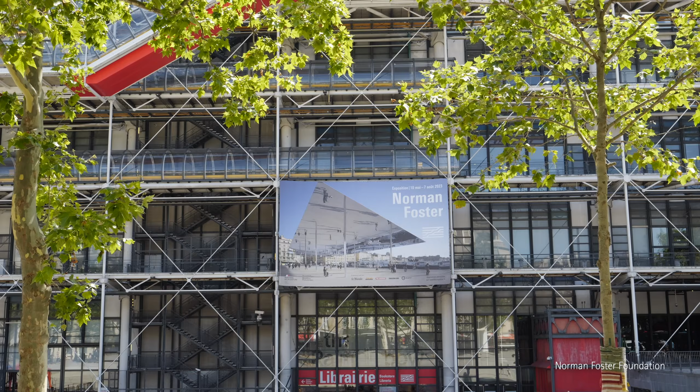The Centre Pompidou is really a pluridisciplinaire institution. It means that in this house we can enjoy all the different aspects of the creative process. There's only one Centre Pompidou, and it is really a cultural mixing pot. It's an iconic structure that comes out of very close colleagues, so it has a certain association with my generation. I was there at the inauguration of the building with the architects. So in that sense, it's very special.

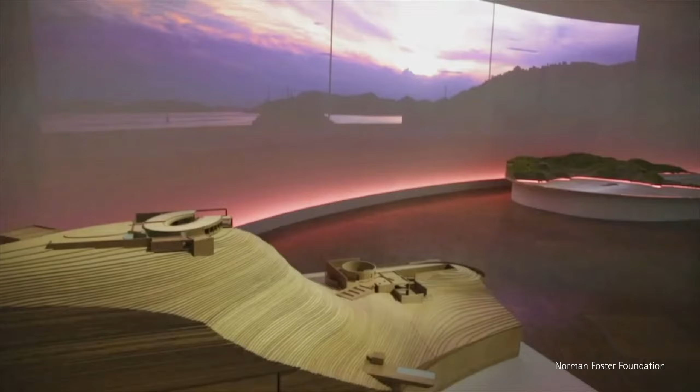First, I met Norman through books, through his presence in the history of architecture. And I met Norman in person lately, because I received a phone call from him directly, and I was very surprised. He said, 'Hello, I am Norman Foster, and I would like to know if it's possible to visit the Tadao Ando exhibition.' I said I would be very pleased to introduce him to it. He came with Elena Foster, and I made a full visit of the exhibition. At the end, I understood the desire to do something like this was present. Three months after, I asked for a personal meeting with Norman in London, and we began to speak about the opportunity to do something together.

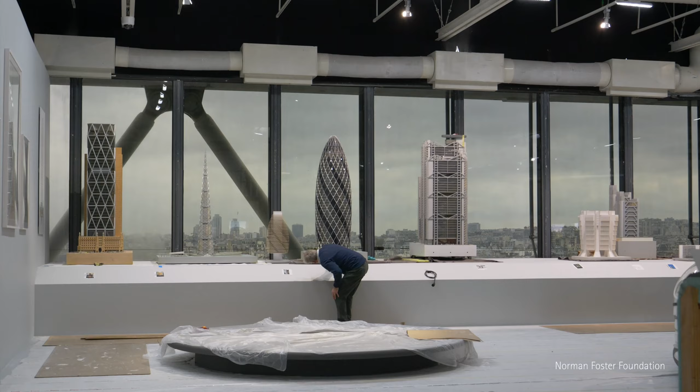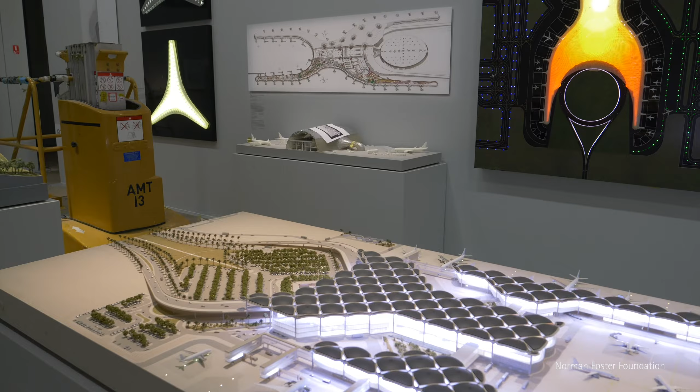Pompidou is about breaking down the barriers between the different disciplines: visual arts, film, photography, painting, sculpture, architecture, design. The exhibition we created for that venue is similarly about design in a broader sense. It's about issues of the city, master planning. It's about artifacts, vehicles, flying machines. It's about beauty, it's about function, it's about the common denominators that bring these different aspects of design together. So there is a synergy between the mission of Centre Pompidou and the exhibition we created for that venue.

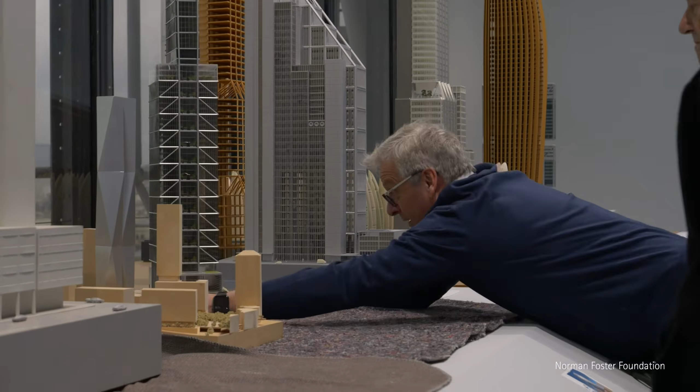To host the Norman Foster exhibition at the Pompidou is really a very specific moment. The concept behind the exhibition was to show a wide range of work over a long period of time, but also to communicate to an audience, really in the visual arts, that there are very powerful connections.

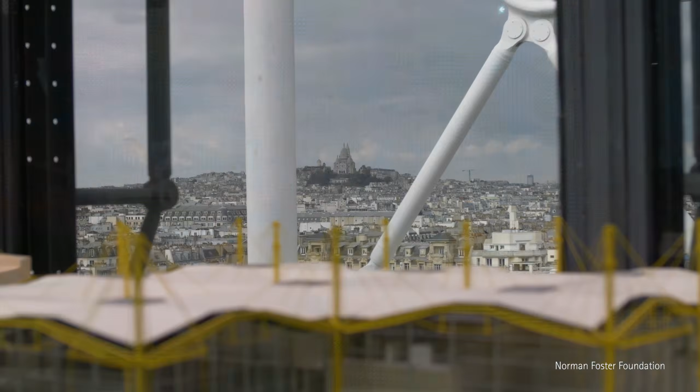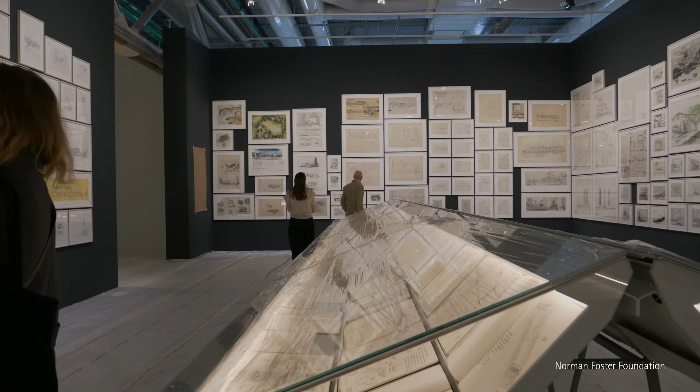And we had the opportunity to develop this cabinet of drawing, cabinet de dessin, and to be in the heart of the conception of the work of Norman. On one side, all the original drawings made by Norman himself—not all, but some notebooks, 300 from a collection of 2,000—and photographs as a kind of memory of the real he developed along his life. We are very happy to have this fantastic moment where we can discover a unique universe and a global, comprehensive journey into the mind of Norman.

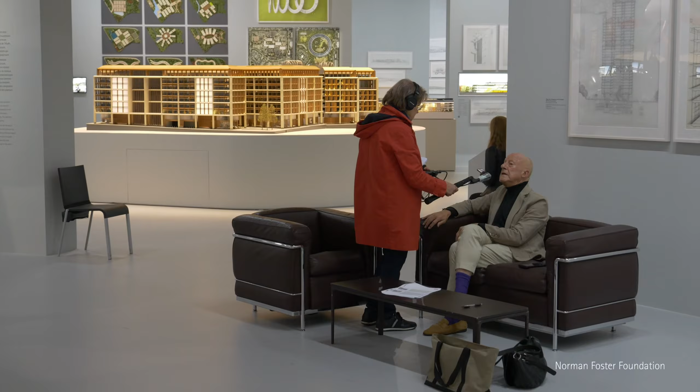It was difficult for me to understand how the public, a larger public who don't know a word about architecture, could be interested by drawings of architecture, which are really abstract and conceptual. It was absolutely fascinating at the opening to see people staying a long time in the room and being completely involved in the way of thinking of Norman. It was the major part of the exhibition, and it was the way to re-articulate all the conception and distribution of concept—the 7 main concepts we used to organize the topography of the show.

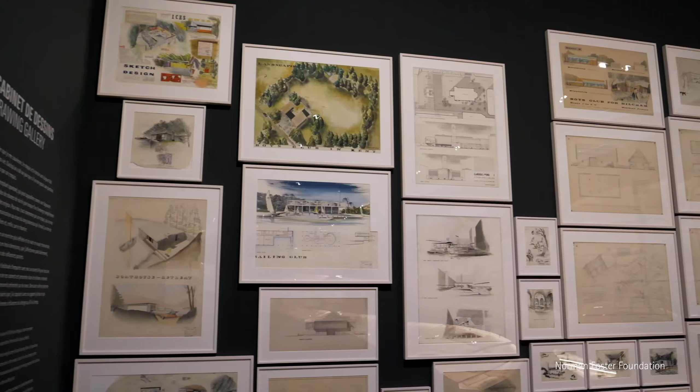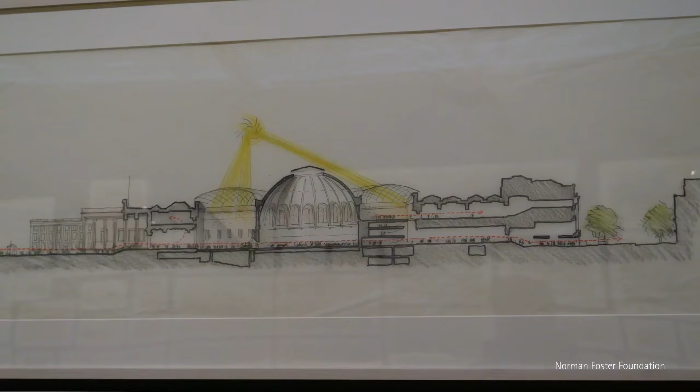The entrance to the exhibition is here, and symbolically, the Millau Viaduct leads you into the first gallery. This gallery is devoted to sketches and drawings. The drawings here start in 1956—that's Manchester University. They move on to Yale University, and they track through the practices of Team 4, of Foster and Partners, and the foundation. The idea of entering through a gallery about sketches and drawings is really about the importance of the sketch, and the fact that it's the start of so many of the designs you will see in the main gallery that follows.

Then what are the influences going back in time to the 1960s? The 1960s was arguably the birth of what we now call the Green Movement. So the early works and everything that followed really can be related back to these early influences.

The reaction to seeing so many projects over such a long period of time, well, 7 decades, reinforces the reality that architecture is very much a team activity. So it was an opportunity to pay tribute to the many thousands of people who've come together over those 7 decades.

So we've come from the darkened space of the sketches, and literally the space expands here. This exhibition dedicated to the life and the world of Norman Foster is really different, first in the scale. I think it's, in one word, a big show. But when something is big, sometimes it could be complicated.

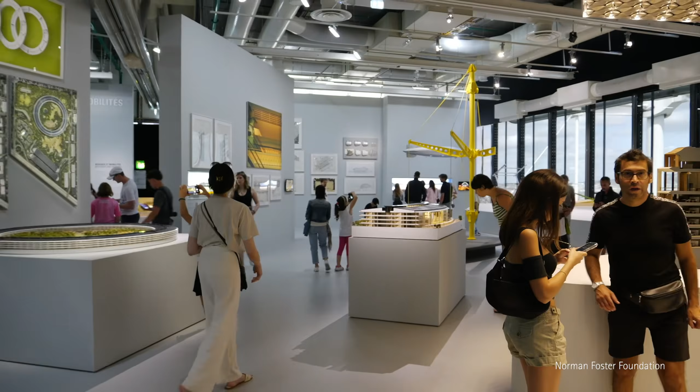But in this show, it's really a tribute to the architecture of the Pompidou Center. The space is free, and we have the entire surface dedicated to the world of Norman, with a very specific dialogue between works of art and models, which makes really this adventure unique.

If you begin to work around the production of Norman Foster, you think, what are the seminal buildings? What are the iconic buildings you need to have in a book, in an exhibition? And you begin to make the list, and immediately you have 90 buildings.

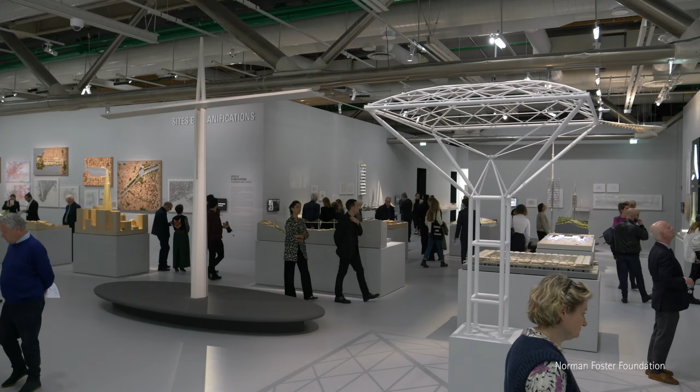It was the idea of the notion of the theory of systems, and it changed completely my scope - not to understand the work through the notion of high-tech, but going through the development of the work through the years. This notion of systems comes to me as absolutely determinant.

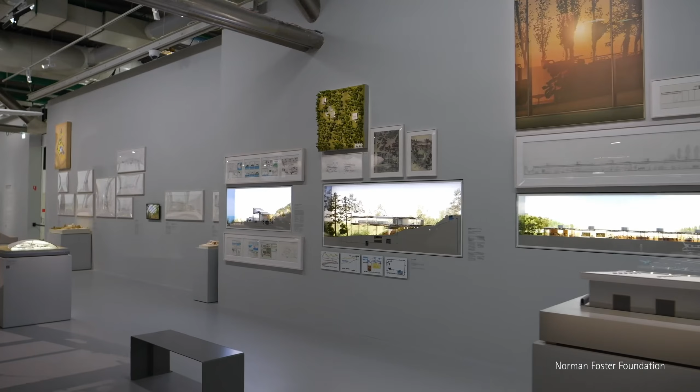Working with Frédéric Migayrou, the curator, he encouraged the division of the exhibition into a number of sections. The opening one is nature and urbanity, making the point that they're really connected - encouraging density, preserving nature, avoiding sprawl, setting in a way the stage for the wider exhibition itself.

Here we have the early projects of Team 4, starting in 1963, again very much about preserving the landscape - dense clusters, but with privacy ensured by design.

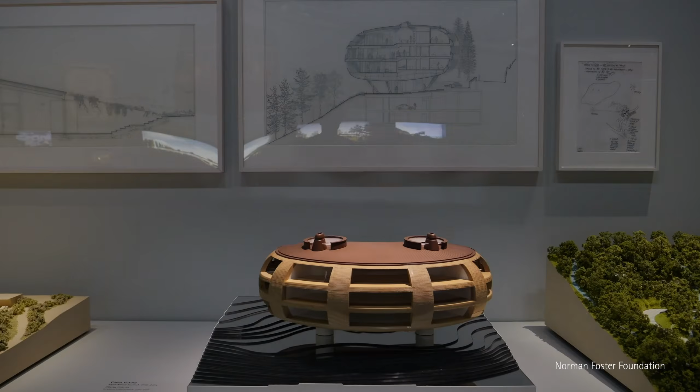Then there's an inevitable transition, almost seamless, of the projects of the practice, starting with Foster Associates, to really the birth of the present practice of Foster and Partners.

This project for Reliance Controls was a transitional project from the Team 4 practice to the present practice, and is very much the birth of a systems approach to design, the integration of systems.

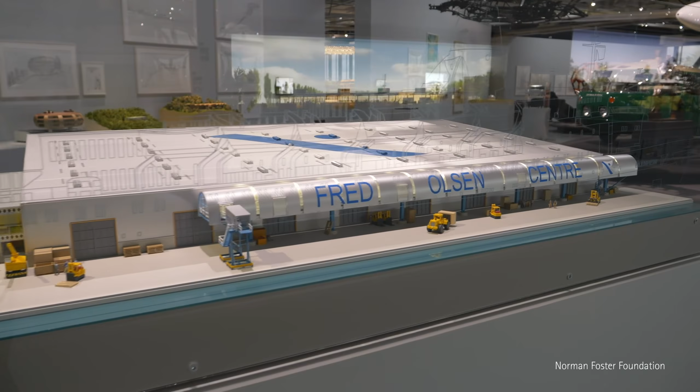This project was a pioneering project, both socially and technologically. This small amenity center, which brought together dockers and office workers, was revolutionary. It introduced open plan materials that were about conserving energy. It incorporated heat recovery - these were truly revolutionary in the very early 1970s.

Going back in time to these early projects of the late 1960s, the early 1970s - how to communicate some of the ideas which at that time were really revolutionary. They're now much more mainstream: harvesting energy through solar, through wind power, recycling waste, human waste to fertilizer.

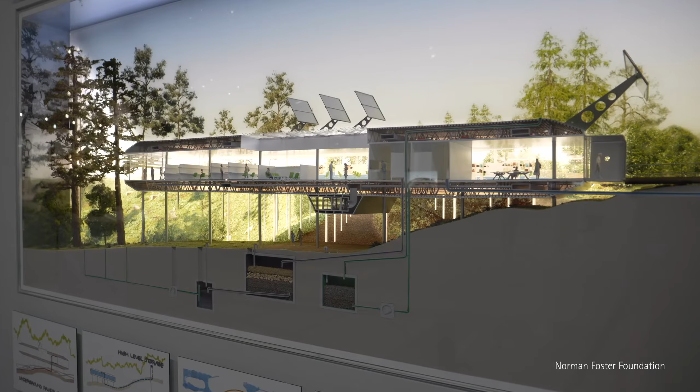So I developed with the model making team the idea of a diorama, so you can start to see the dialogue between the systems in the model and the sketches of that period.

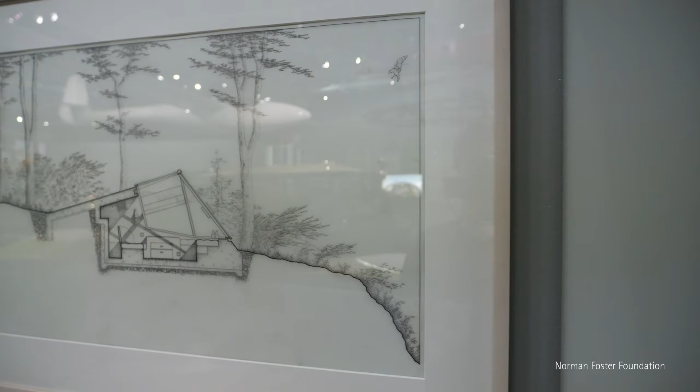In the theme of nature and urbanity and how you relate to a landscape - this very first project, the first in 1963, of digging a small gazebo into the landscape, has its reverberations many decades later in the Air Museum for Duxford, which is also a memorial to the American airmen who lost their lives in World War II. Again dug into the landscape in the same way as the National Botanical Gardens of Wales or an elephant house in Copenhagen, all deferring to the landscape.

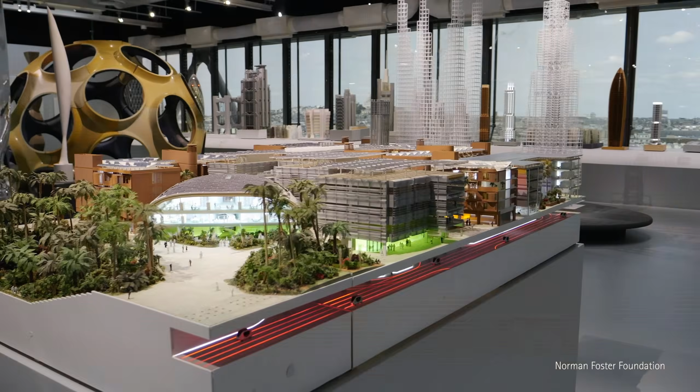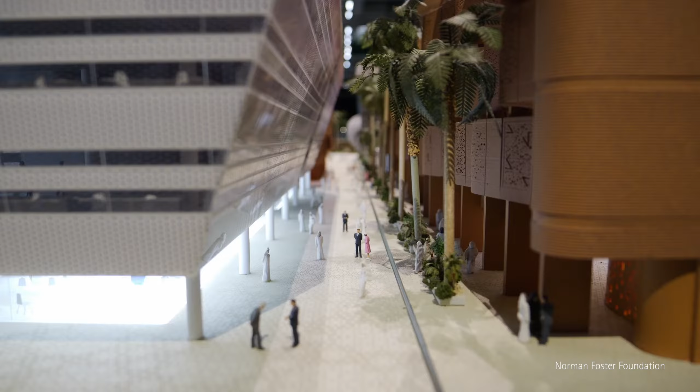Still under the theme of nature and urbanity, we have Masdar, which is a series of experiments, but essentially it's a community, a research university in the desert in Abu Dhabi, working with the climate, learning from traditional dwellings, and combining that with the cutting-edge technology of solar power. So it is today still - that experiment running 24 hours every day of the year, totally solar powered as a research community.

The exhibition is like a door open to the works, giving the public an opportunity to have an extended understanding of this research developed through 60 years. And as I spoke about, you can't exhaust the work through an exhibition. The work has to be developed and will be exhausted, or never exhausted, by critics, historians, other exhibitions and so on, because there is too much sense in the work.

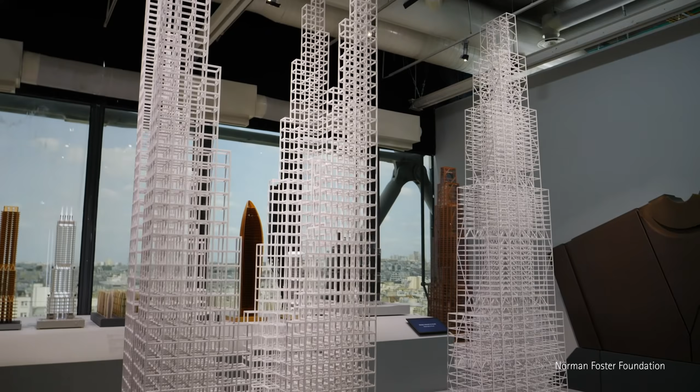There's a transition in the exhibition from the subject of nature and urbanity to the vertical city. You could say the high-rise building is emblematic of the modern age, of the modern high-density city. Along the way, we try to show insights into the process of design, the exploration that might be in sketches and drawings, as we talked earlier, but it might also be in models which explore different aspects of the design.

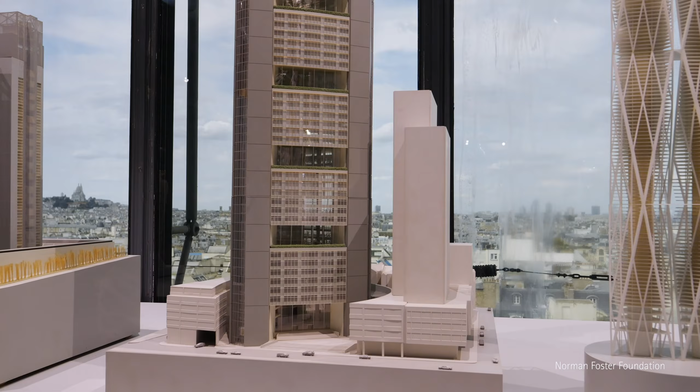Here, a high-rise bank in Frankfurt. This is a model of the Commerzbank Tower. It was conceived in the early 1990s, realized in the late 1990s.

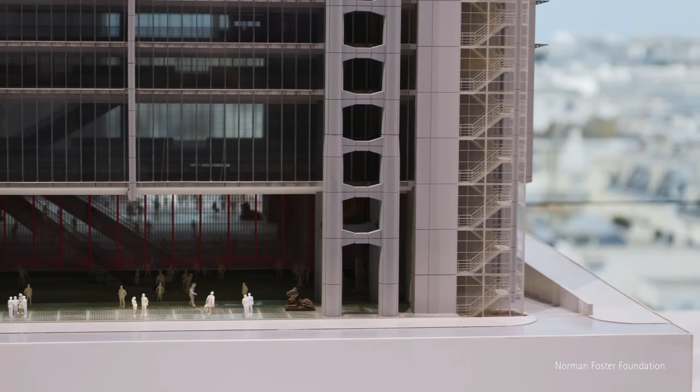And it is the first breathing building, the first naturally ventilated high-rise building. This design, which I did as a student at Yale when I was doing my master's in the 1960s, where I eliminated the conventional central core, was really the basis of the future Hong Kong and Shanghai Bank Tower in Hong Kong, which for the first time in a high-rise building eliminated the traditional central core of structure and services, and instead fragmented it and put it on the edges of a completely flexible loft-like space.

This tower was conceived for Swiss Re in London. Again, in London it was revolutionary. It's a breathing building, the facade opens up, air movement is encouraged through the spiral. So it's working really like an aircraft wing, creating opposing pressures, low pressure, high pressure, drawing air through the building, reducing energy consumption and also making it a healthier building for the occupant.

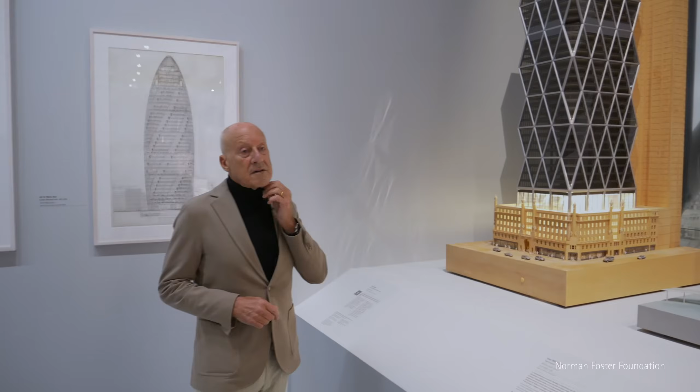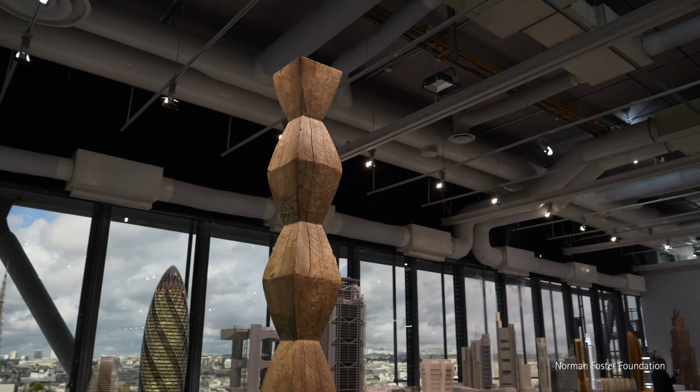This tower for Hearst, at the time, in sustainability terms, was pioneering. And at a completely different visual level, there is a certain resonance between these diagridded, faceted structures and the early Brancusi endless column, with its beautifully proportioned rhomboid shapes. You could say, in many ways, that in anticipating the future, we have reinvented the nature of the workplace, reinvented what a high-rise building is.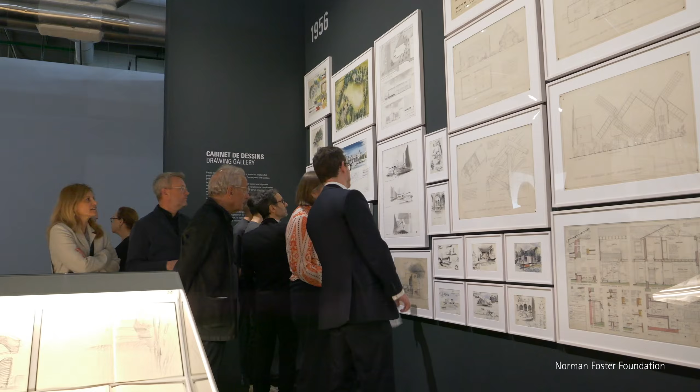I worked a lot on the sources of Norman, and I was always fascinated by his ability to absorb anything. I think it's important now for this retrospective to organize a new overview of his work, because his work is famous through buildings which are iconic all over the world. The project for me was to understand the deep understanding he had of architecture since the beginning of his involvement in this world, when he was very young. There is a continuity in his research, and there is a 'source' - I was mainly interested by the sources of Norman Foster.

A distinguished critic said you could divide all of our projects into two categories: skin and bones. Either the building is an expression of its skin, its external envelope, perhaps smooth and streamlined, or it might be an expression of the bones. You can find the same analogies in the world of sculpture, automobiles, aircraft - very much about the 1930s, anticipating the wind tunnel that would streamline revolutionary vehicles like Buckminster Fuller's Dymaxion car.

I worked with Fuller, affectionately known by his friends as Bucky, for the last 12 years of his life. So my creation of this authentic version was really homage to my mentor.

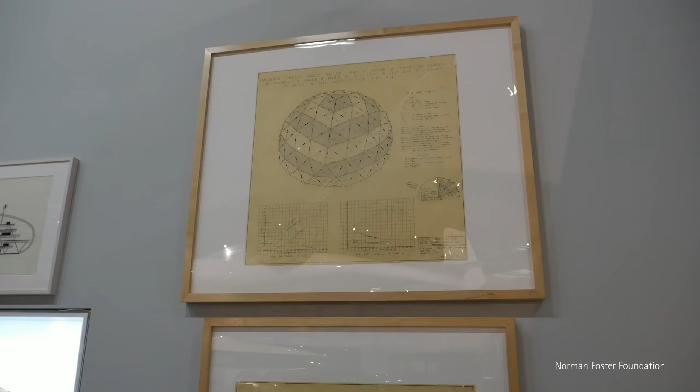He's perhaps well known for the geodesic structures, the diagridded structures which you can see here in the solar house that we worked on together - unrealized but hugely influential as a prototype - and also at the time the so-called fly's eye dome, which resolved the structure of a triangulated form but with openings that would transmit light and also air. So again, these are research exercises into an architecture which would work with nature, which would reduce the amount of energy. There's an anticipation here of a future still to come.

Sometimes you make a division between architecture and other parts of the world of art. But I think with this show, you can enjoy it aesthetically, like a show of an artist. But you can also, if you take time, really be, for the first time, inside the creative process of what it means for one man to produce such a huge amount of projects, so different. I think it's the balance between the inside story and the pure pleasure of discovering what a model is - you are really in the spirit of what is the specificity of an exhibition in the Pompidou Center.

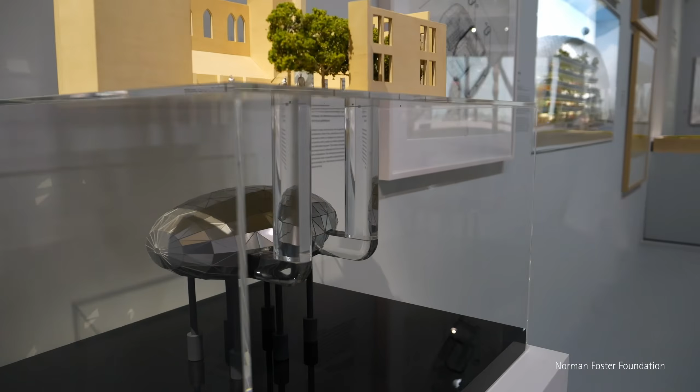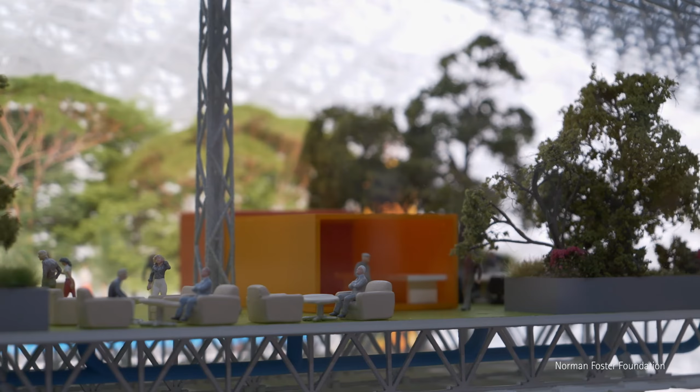Over the 12 years of our working together, one concept unrealized was the idea of Climatroffice. Climatroffice would be like a big, almost transparent, structural, filigree structure that would transmit light and air, and within that environment there would be nature - greenery, trees. It was a kind of utopian vision of the workplace of the future.

As we move along the models in this part of the exhibition, we're continuing the theme of skin and bones. The arch of Wembley Stadium is not only emblematic and symbolic of that historic past, but it's literally the very structure expressed that is holding it up.

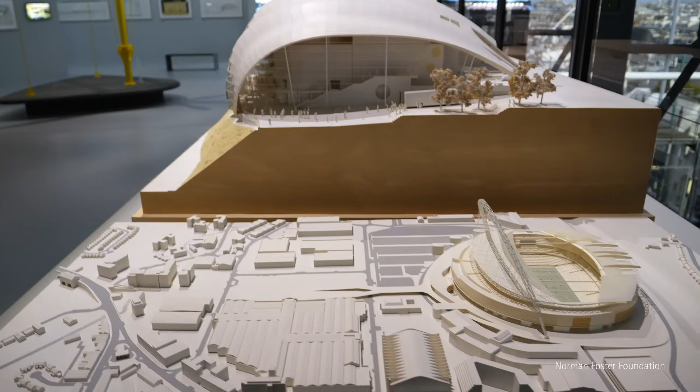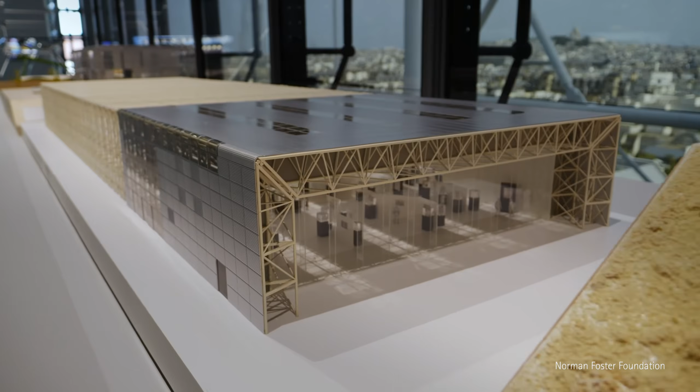By contrast, this complex of musical spaces for the performance arts, the Sage in the north of England, is very much about the skin, the voluptuous form. And as we move from that to the Sainsbury Centre, very much the expression of the skin of the building, and only its bones, its structure, revealed at the ends, like an extrusion.

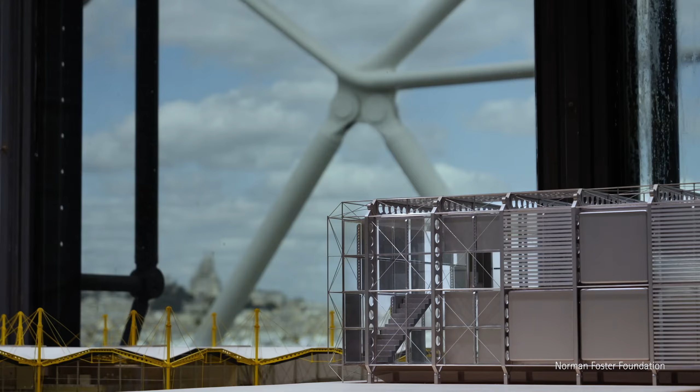I was encouraged by Frédéric, the curator of the exhibition, to create this model of what he sees as a very important project from the past. Unbuilt, it was a house in Hampstead, and as you can see, it's very much about the expression of the structure, and incidentally has a certain resonance with the structure of this building, which you can see outside.

Renault, again, a very clear expression of a suspension structure, and an element of it here, kind of writ large, recreation of the corner module.

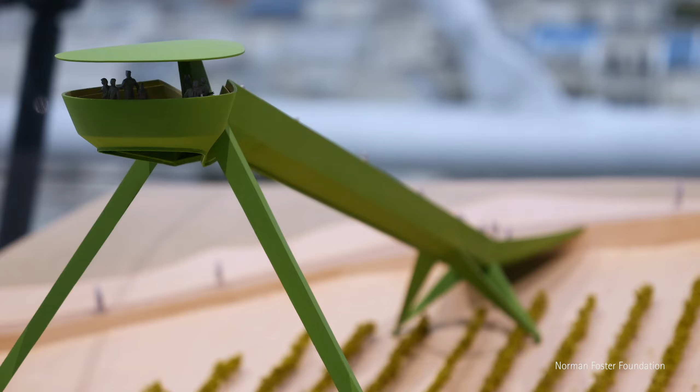This is an exploratory project by the foundation team. We call it the Grasshopper, and it's part infrastructure, part of the pedestrian route of this Château La Coste in Provence. Here this is in effect an observation platform, but again very much the bones of the structure, and it touches the nature very, very lightly.

Almost in the same way that this table, which has certain affinities with the lunar explorer of the late 1960s, again touches the ground lightly and is very much an expression of its structure.

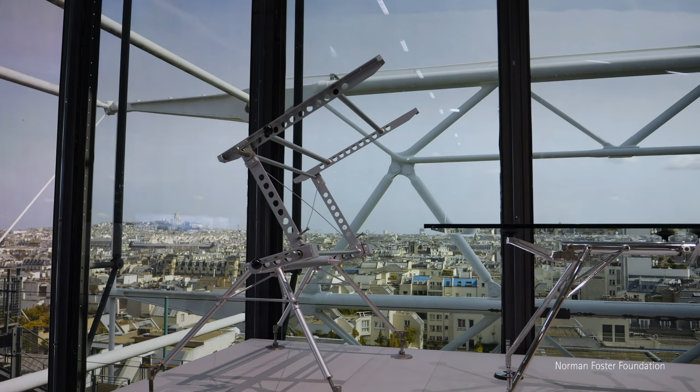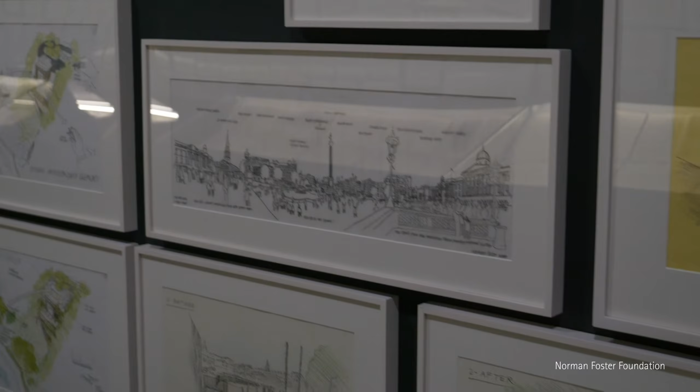Norman Foster works on any kind of program. All the programs developed by architects were at a certain moment absorbed in the work of Norman Foster—in urbanism, in technology, any kind, offices, museums, high-rise towers, and also urbanism. The idea of public space, the idea of community are very strong. The notion of the city, the extended city, the notion of networks at the world level, all those dimensions are in the work. To specify whether they are specifically treated and understood by Norman is very complex, because it touches any dimension of the work of an architect.

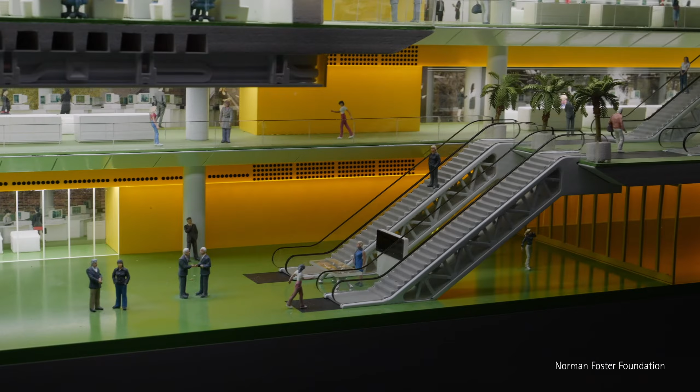This diorama is showing a project called Willis Faber. There's a dialogue with Ben Johnson's painting of the period, and it's reimagining the workplace with amazing roof gardens, landscape, great restaurants, movement by escalators in the sunlight, a mega swimming pool, the introduction of flexi time so that members of the family can come along and out of hours use the pool, the facilities. So very much about a lifestyle, anticipating a lifestyle of the future. And this, of course, is in the early 1970s.

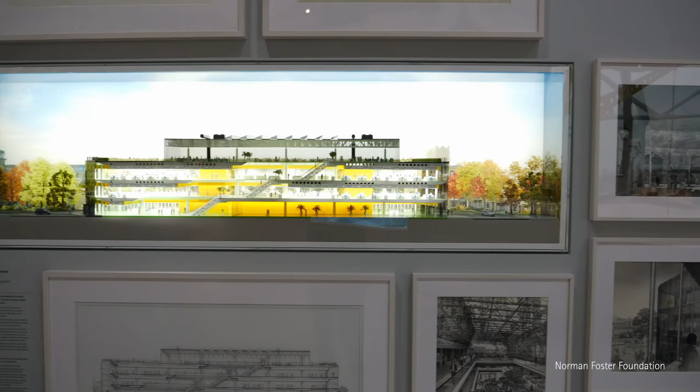For me, Willis Faber is just the extension of the Climatroffice, realized in a very realistic way, but this is an accomplishment and everything is already in this building. All the extensions, all the projects which will be developed later are in this building. Willis Faber, for me, is a key building.

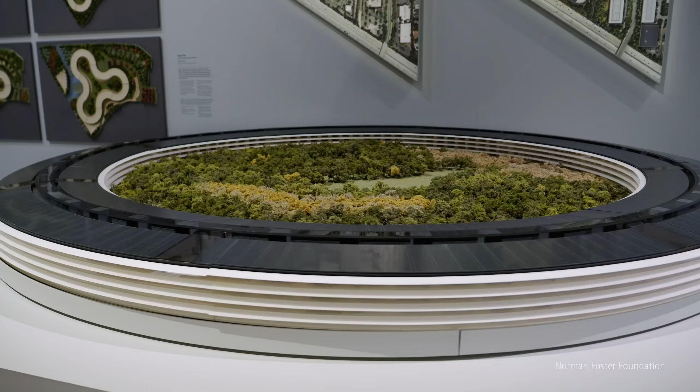This is the headquarters for Apple in Cupertino, California. You can see here the before model: 24 buildings, car park, tarmac, virtually no landscape, and its transition into one large building, which, yes, is physically large, but in concept is really compact, because it's bringing everybody, those many thousands, under one roof for creative connectivity, and it's freeing the landscape for 10,000 new trees, acres of vegetation, trails for hiking, walking, cycling.

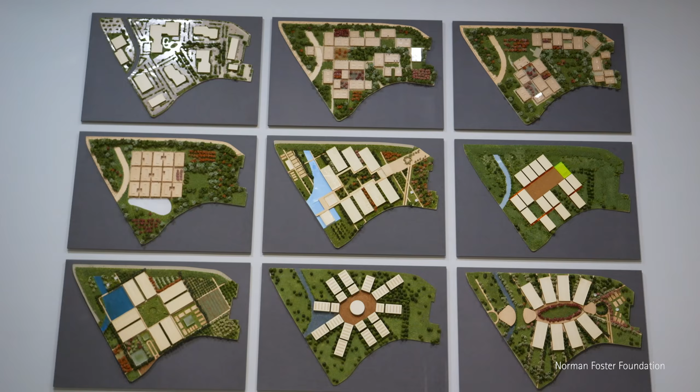And perhaps it looks inevitable as a circular building in the landscape, but that was really, as you can see here, an insight into the process. These were the exploratory studies that occupied perhaps some 9 months of time before the circle emerged as something that would answer Steve Jobs' ideal for what he called an internal pod.

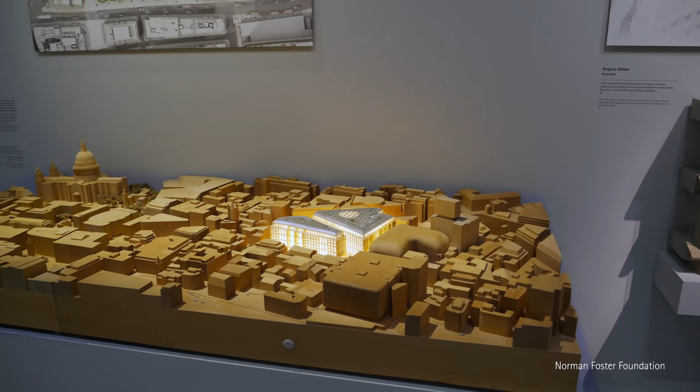If the Apple Park was very much about how you create a healthy, breathing building in a suburban setting, then the challenge was even greater for the Bloomberg headquarters in the middle of a busy city. Here you can see the external grills which shade the exterior, but these are also filtering the air and attenuating the noise from the traffic outside.

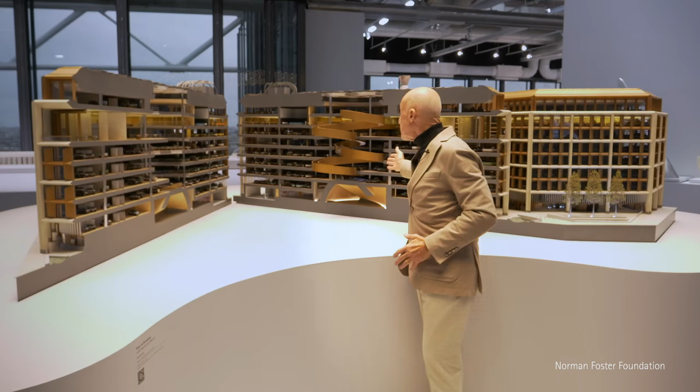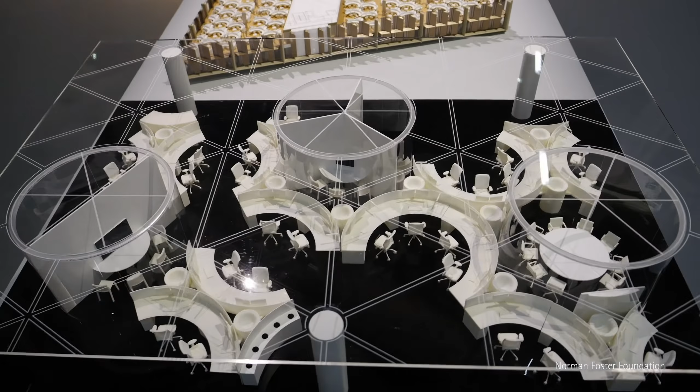And so this breathing building, the air is moving from the perimeter to the very heart. In this model, you can see that the heart is a spiral pedestrian movement within the building, encouraging people to creatively engage with each other informally. So it's very much about the environmental systems, the ecology of the building, but also creating a better working environment. And the combination of a ceiling which was created specifically for that project, reducing the energy dramatically, and working acoustically to enable the floors throughout to be warm timber.

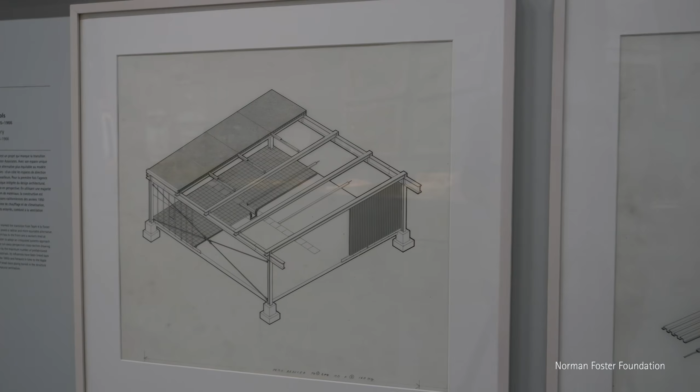For me, there is an important phenomenon in the work of Norman: continuity. Everything is present at the beginning, and protected along the years. For example, the idea of the offices as it appeared in the first projects, Reliance Controls or Fred Olsen, was completely transfigured in the project with Fuller for the Climatroffice. But if you look closely at the Climatroffice, you can see it in many other projects. Willis Faber shows the same configuration. There is continuity, and at the same time, an extension and diversification of the work. This is absolutely fascinating.

Here we have a winery, one of several we've explored, this one in Spain, going back to the roots of a winery, working with gravity, interestingly avoiding the mechanical interfaces between the movement of grapes.

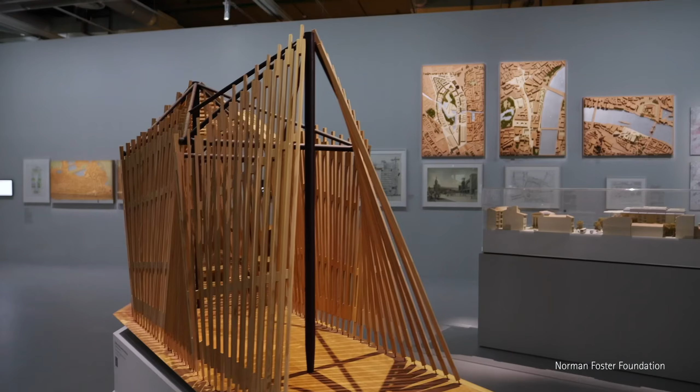This is a very small project, a chapel for the Vatican in Venice, again very much about working with nature. What you're not seeing here is the extent to which this is overgrown with honeysuckle, which gives not only green vegetation and white flowers, but also very much the fragrance of the experience.

This was a project in Madrid, which we presented at COP26 as the most sustainable project in the history of the practice. It goes beyond all the normal ratings to truly meet the climate objectives of the Paris Agreement.

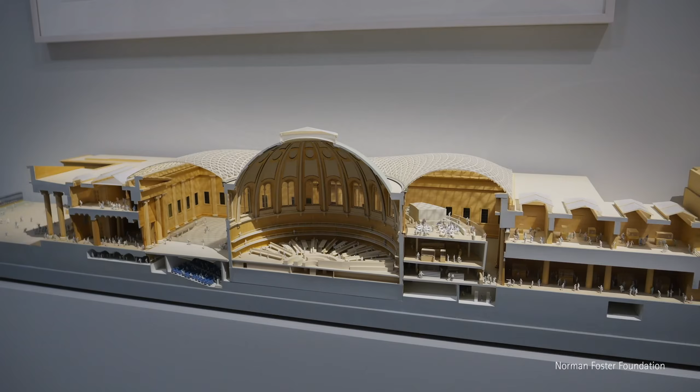Interspersed through the galleries are screens which bring to life, for example here, the British Museum. So there you see it as it really is, with people moving through it. And here, the early models showing how we were able to reveal the library by cutting away a lot of excess buildings of no quality that had accumulated, going back in time to the original courtyard, inspired by history.

A certain success of the exhibition depends on the tension between two parameters. The public, who don't know a word about the architecture of Norman Foster, understand immediately that there is something universal in the work. It deals with the world, with all locations, all programs in the world - transportation systems, museums we spoke about - in one way. But it's also dealing with an individual, somebody thinking, completely involved in the work. This tension between the universal and the particular is absolutely fascinating.

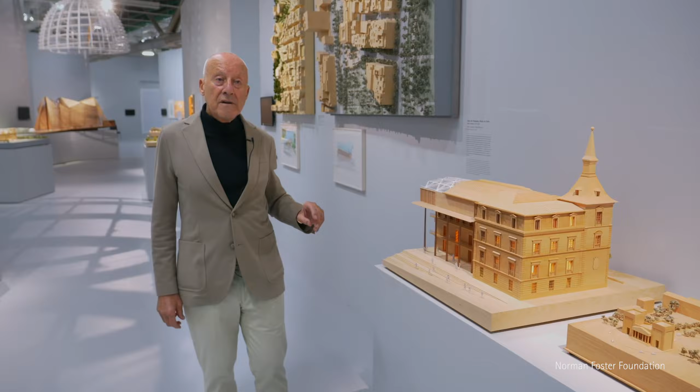This is a project currently under construction for the Prado in Madrid, the Hall of Realms, peeling away the layers of history to reveal the original building, the oldest in Madrid, the original brick facade going back to the 17th century. Above it, because the roof had to be replaced anyway, we created a flexible big-span gallery for contemporary art and temporary exhibitions.

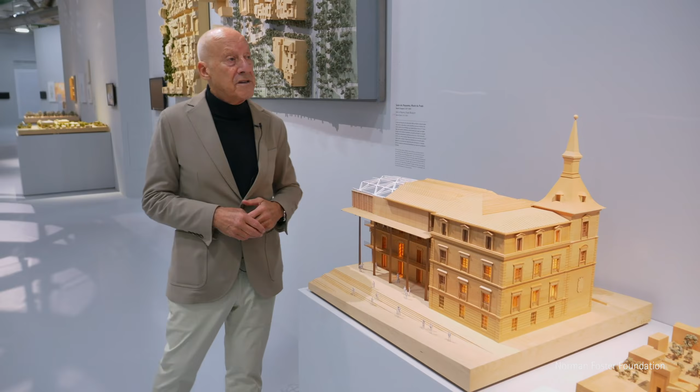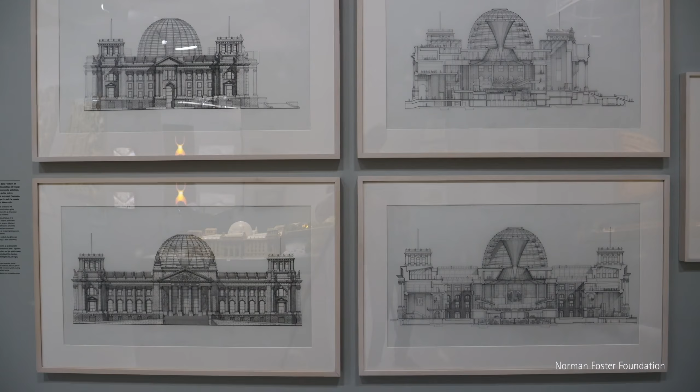Here we have the Reichstag, which was symbolic of a reunified Germany, and the cupola, which symbolically places the public above the politicians who are responsible to them. It's an exercise in a zero carbon building, a kind of energy manifesto for the future, conceived and built in the 1990s. The Reichstag is an incredible accomplishment about the idea of democracy and shared ideas between politics and people through architecture, through a building.

What is important to understand about this exhibition, working with Norman, is the dialogue, the permanent dialogue we had together. I proposed some concepts, he kept some of them, he changed some organization. For example, at the beginning, I thought it was very important to see realized architecture, so I proposed to have models and drawings below, with large screens above, so the public could be completely involved in the reality of the images of architecture.

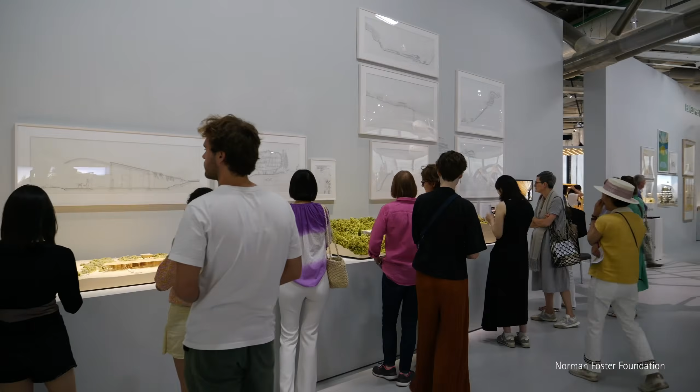In the end, we developed the concept in the larger space, and I was surprised because he told me he would like to keep only models and drawings and have the projects on little screens. I was a little bit afraid - what would be the public's apprehension of the reality of architecture through little screens? But it was true: to have this feeling of being involved in the world of conception through the drawings and models is something else. I think the public appreciates this a lot.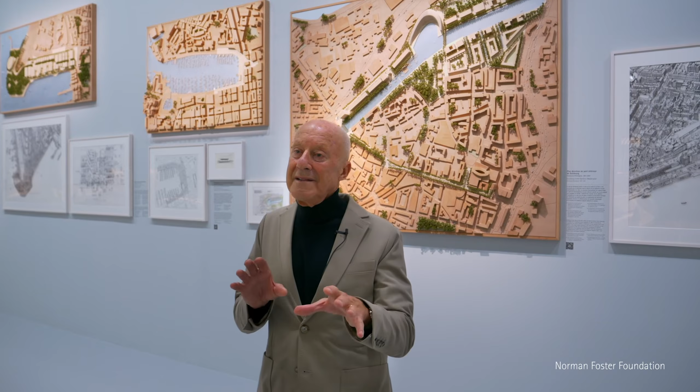If individual buildings are important, then I would argue, even though I'm an architect and passionate about the individual building, that the infrastructure of a city which determines its identity, its DNA, is the urban glue which binds the individual buildings together. So that leads us to planning and place, the importance of master planning and the creation of spaces.

An important work of an architect, of an artist, the global work, resists interpretation. You can't easily interpret his work, you have to go deeper in the understanding. I tried to do it, and of course, through months of research, my understanding changed completely. I tried to share this with Norman.

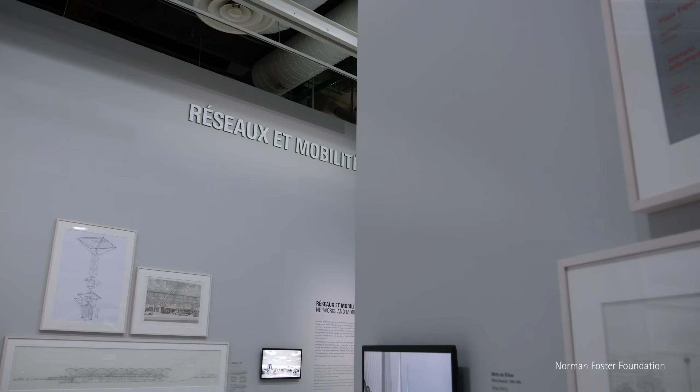Then, of course, there's a section on network and mobility, very much about the movement of people, goods, information, whether that's a transmission tower overlooking Barcelona, or an airport in London, Beijing, Hong Kong, but looking at ways in which this infrastructure can reduce energy and work with nature to bring in top light, sunlight, and natural ventilation.

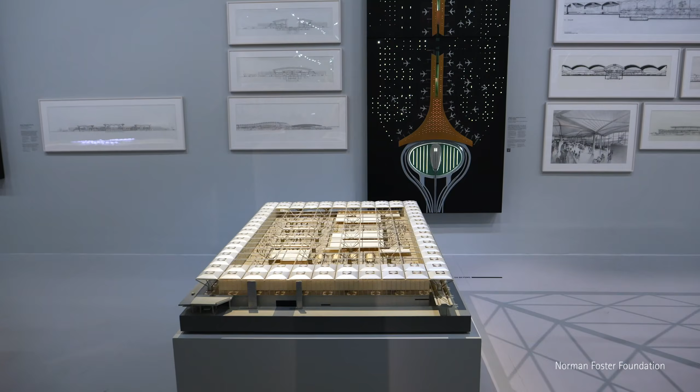This model of Stansted is a reminder that this was the beginning of the reinvention of the air terminal, to move all the heavy services, ducts, artificial lighting out of the ceiling, and turn that upside down, opening the roof up to natural light. That influenced other designers and planners of airports. It became the new model, with different iterations by our own teams over time.

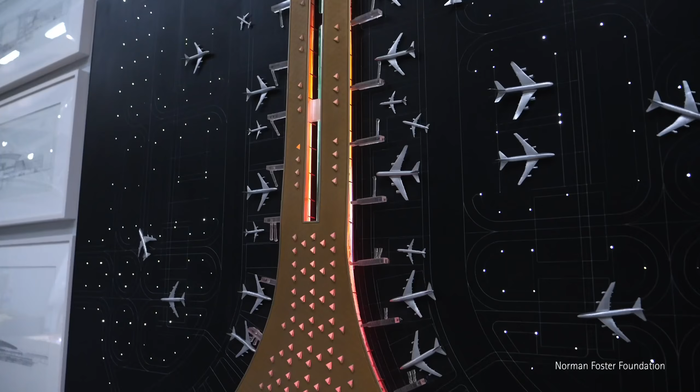The latest, unbuilt in Mexico, other iterations here in Beijing, Hong Kong, and Kuwait, and a spaceport in New Mexico.

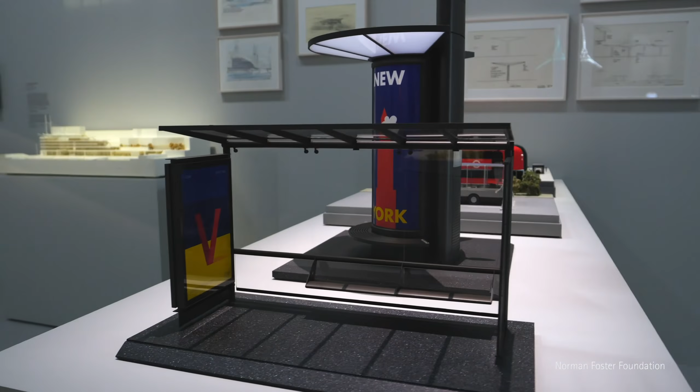Here we have buildings that very much relate to the whole network of mobility, whether it's a charitable project which transforms the education of young people through the discipline of rowing, or the yacht club in Monaco. And then the yacht club gives way to yachts, gives way to boats, the importance of urban furniture in the streetscape of a city, the mobility of buses, and the idea of how you might give a more gentle identity to the filling station.

From the design of boats into the world of the future: our work with NASA on Martian habitats, the European Space Agency on lunar dwellings, and drone ports for rural Africa. What they all have in common is that you use the local material, the moon dust or the Mars dust called regolith, mixed with an additive, and then robotically create dome-like structures.

These structures learn from the structure of animal bones to create deep but highly efficient, porous structures that will withstand small meteorites, with damage that can be easily repaired.

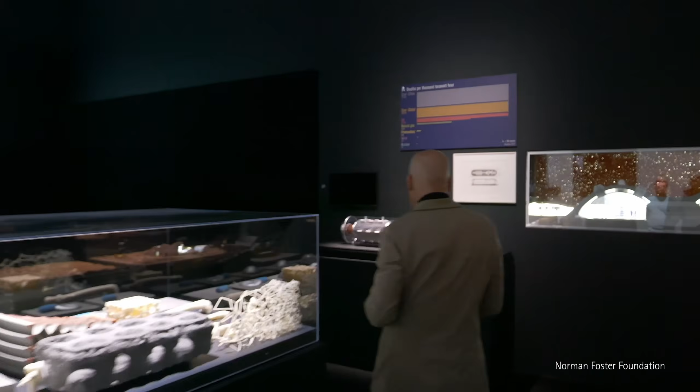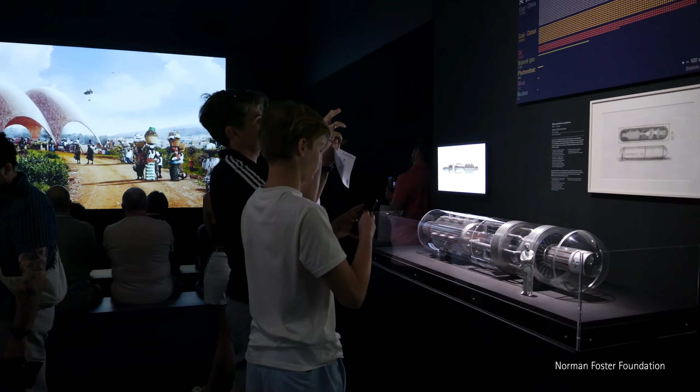And then the Norman Foster Foundation in Madrid, working with MIT, with CANES, the Center for Advanced Nuclear Energy Systems, on the potential for autonomous power, a new generation of nuclear, but rooted in experience from the past, the microreactors. It seems incredible because there is a frightness about nuclear, but it developed a kind of safe project which could be adaptive to societies.

Microreactors have, in many locations, been pioneered since the 1960s. But the new generation, something like this, which would fit in a 6-meter container, could power an entire Manhattan block, just parked in the basement.

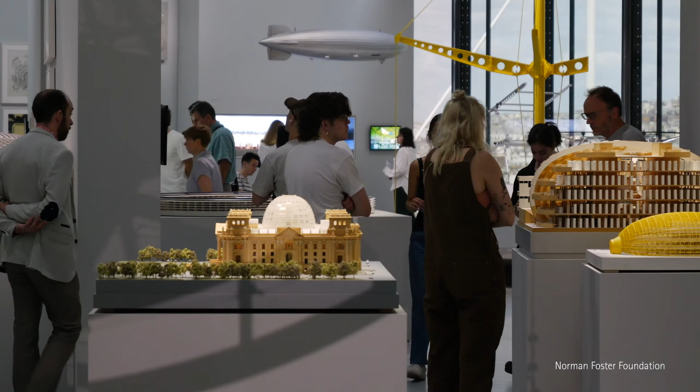Still, I don't know how many buildings were realized by Foster Studio. 300 something, 350. How many were studied? 1,000, 1,500. To go through all those projects is really complex and needs a lot of attention, and I'm sure it will be done by other critics and historians in the next years.

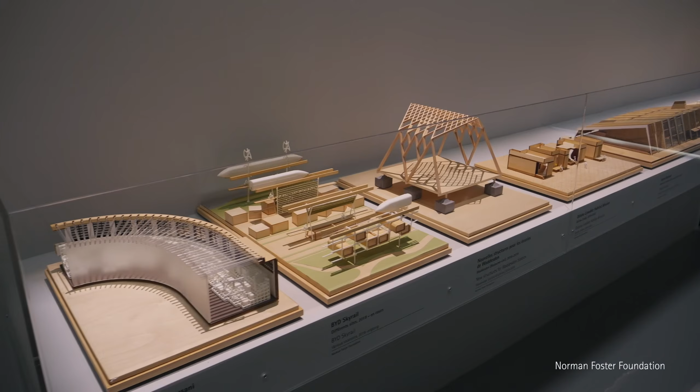Being able to stand back and see that larger body of work, a retrospective, although one distinguished architectural critic, when I described it as a retrospective, said no, it's a futurespective, because everything that you've done has always been projecting a vision for the future. Buildings that would be able to adapt and respond to change, and in some ways provoke positive change, social change, technological change.

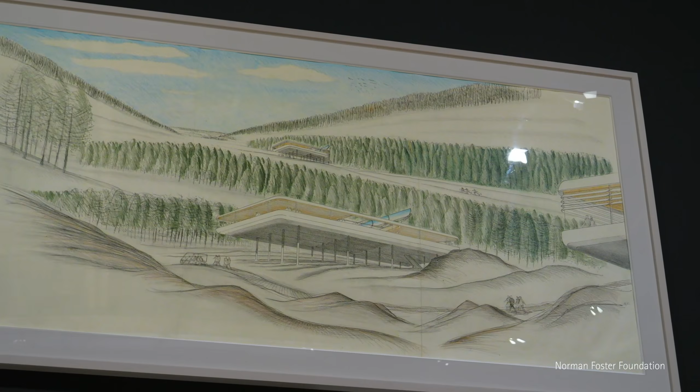Here the Futures section marks the end of the exhibition. For the first time, we can look at works spanning 6 decades, and several themes weave through the models, the drawings, and in most cases, images of finished buildings. There's a quest for light, lightness, and accord with nature to capture the beauty of the sky and views.

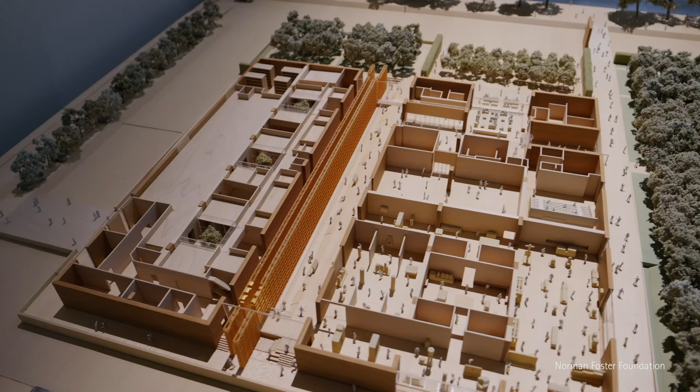There's the pursuit since the 1960s of what is now called sustainability, in the forms of conserving energy and recycling waste and materials, recycling historic buildings, conserving the precious commodity of land, and encouraging the pedestrian experience by building compactly to avoid sprawl, respecting and learning from history and tradition. In short, the exhibition shows that we design with an awareness of the past for the needs of the present, and to anticipate a future which is essentially unknown.